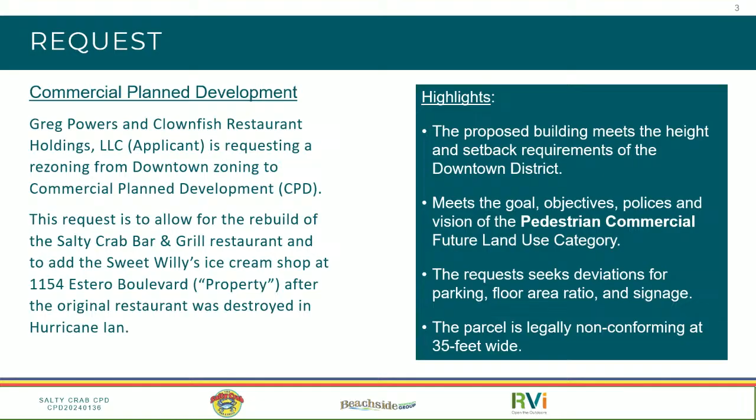This is a legally non-conforming lot formed, I think, in the 60s or before any of the official zoning codes, only 35 feet wide, where the standard is 40 feet. So it's a narrow lot, which adds some constraints to what we can do there. But we'll show you what we propose to do, and hopefully you like that.

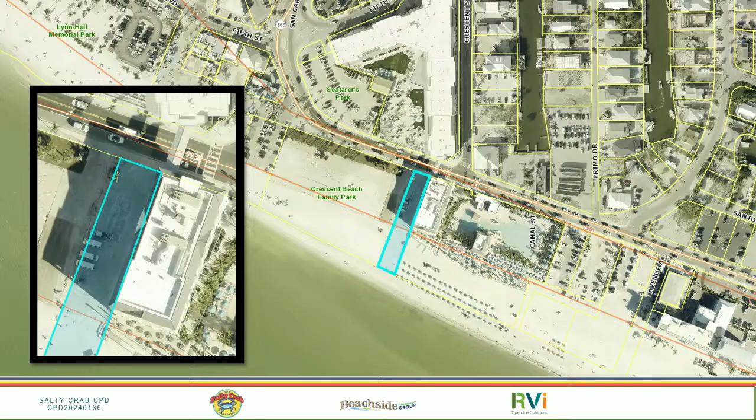You know the location really well. That's obviously the Margaritaville to the right, with the beach club piece. Did a little inset there so you can see it. To the left is Crescent Beach Park. There's a few things to note: these lines aren't exactly right with the property appraiser's data, but there's the entrance to Crescent Beach Park, and there's an electric box, a fire hydrant, and so on. None of those are on our property. We're right in between those and the Margaritaville building, and we have an entire facade that will face the beach park there. I'll hit on some of the design features of that.

So let's take a look at the past of this piece of property. What I did was try to look at the historical build and layout of the historical building, and I rounded the numbers. It's not exact, but we have a survey on it so I got pretty close, and there's property appraiser information too. But I rounded just for simplicity of discussion. So it was approximately a 6,000 square foot building.

This is excluding the special exception area that was waterward of the CCCL. But approximately 5,000 feet of it, you can see in the picture on the right, was under roof of some sort.

Right, I was there. Yeah, so I would describe this, I described this, and I hope I didn't insult anybody from my team, just as a seasoned restaurant when I was there. It's a lovely word. Sand and beer, it was just good, an appetizer, a great place. It was fun.

5,000 square feet under roof of some sort, which would count towards FAR, and there was a little over 4,000 square feet under roof on the ground level. That's a big part of this FAR request, that 4,000 square feet on the ground level. Most of that was back of house, the restaurant, storage, the kitchen. None of that can happen anymore, and it's very difficult to get even plumbing or electricity down to that ground floor now. So the use areas have to be pretty open, everything has to be movable. A big part of that FAR is now we have to move everything up to the top floor for that restaurant, and everything underneath counts as FAR. That was our battle in requesting the FAR we needed, since everything has to be elevated now.

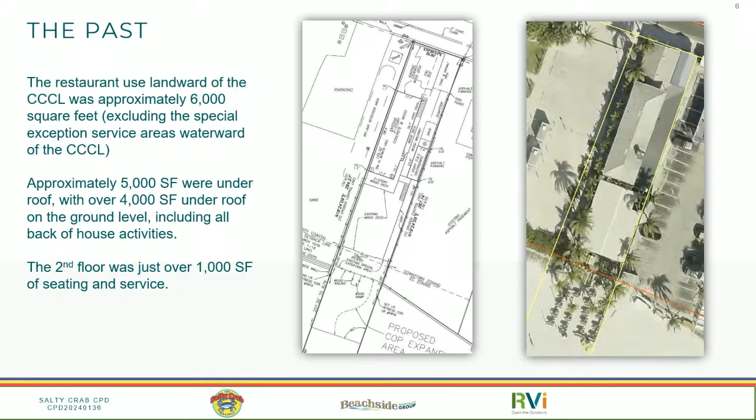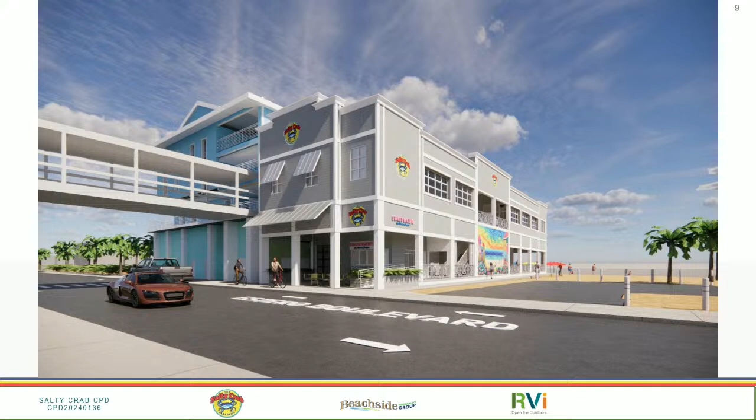So let's take a look at the future. We'll walk through a number of these. The first ones will be architectural renderings. The next ones will be more detailed, giving you all of our heights, square footages, and architectural details that we're willing to share at this time, because we want this to go as fast as we can to get this rebuilt. So we're moving along at our own risk at a pretty fast pace.

So this is the view from Estero Boulevard, looking across from the newly designed area in front of Margaritaville with the new roadway. A couple of the features here are the awnings, part of the condition we put to cover the sidewalk and start to provide shade. I know that's a goal very important to the town, to make this a more pleasant walk instead of just baking everywhere you go in the sun.

Wait a minute, before you move - where is the pull-off for deliveries? Yeah, I can show you that on one of the other pictures, there's a couple that show it really clearly. The renderings don't show it quite as clear, but it is right beside the Margaritaville building. It's a van delivery, not for the bigger trucks - a van delivery with an overhead garage door we can pull into. It's tight, but we can do that. I'll show you that in a second.

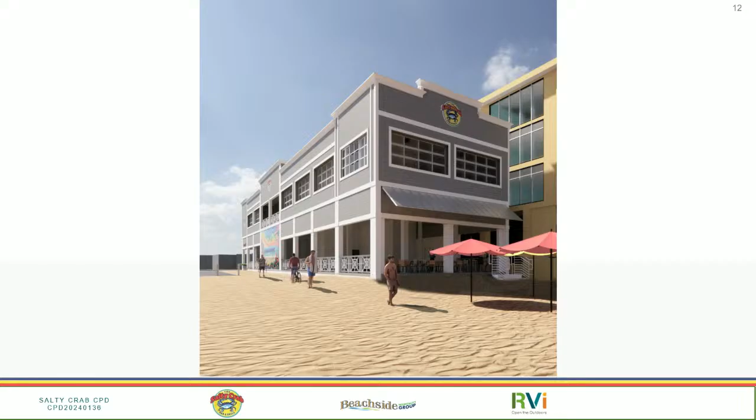All right, let's show the beach side. So this is looking from the beach - it's a little bit different. There's a seawall, a retaining wall actually there, and a few other things, but it just gives you that angle. It produces the same awning on that side. The doors on the second floor are actually overhead doors on tracks that can be opened, so all those along the side and on the back can be opened up during the day for air and breeze, to give that open air feel and be able to look at the beach.

Obviously there's requirements for turtles and things like that, but then there has to be screening and glazing to some of it. So we're working through the details of where that lands, but those can be opened and they are on tracks. So Fred, is that the reason why there's no awnings or anything else - your biggest facade is the most boring one? I'm just wondering, is it because of the roll-up doors or windows? Well, that was part of the thought, just to let that in. Yeah, that's a good question, we'll ask the architects.

We definitely wanted to hit the important parts. Estero Boulevard was the most important part. We wanted to mirror that on the other side, so maybe that's something to think through. That would be another deviation, since it would encroach. But it's just flat, the biggest view, and there's no setback there. I think with the awnings we're allowed to encroach a little bit, maybe 2 feet or so. So yeah, we would need a deviation for that, so that could be an architectural feature option.

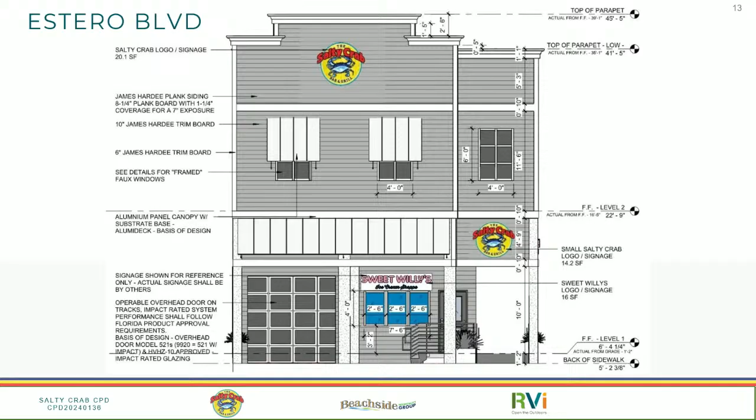On the next slide, this is the one we made a little bit larger over the mural, so that one's 40 square feet. And then we had that one over the entrance that's the same size at 20 square feet. So those are the two signs. This is where you see it from Crescent Beach, and actually from Times Square if you were walking down the street.

Here you can see some of the under area that's on the beach part with those railings. That's all outdoor seating, and you can see the Sweet Willy's shop in the front, and then the stairs to get up to the main seating part.

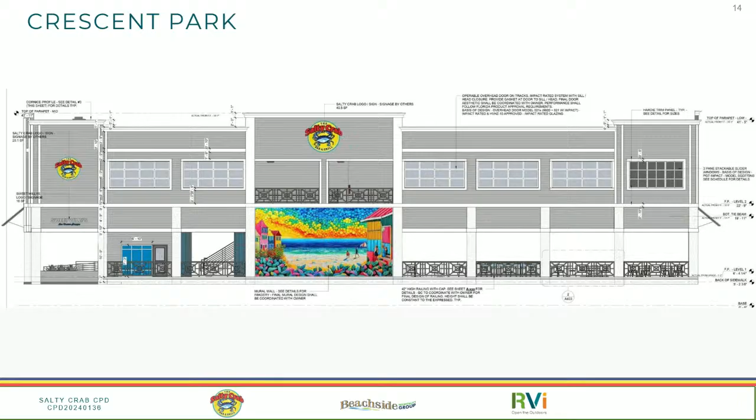So even with your zero setback, there is actually room for pedestrian traffic between those two buildings? Yeah, they have service doors and stuff they use. There's a sidewalk on their side in between there, so yes. Because Margaritaville's set back, you have room for a sidewalk, and they have room to maintain their building. If you have a zero setback, there's enough room that it's okay, they can maintain their building, and you haven't obstructed their views from their rooms.

Is there 5 feet between buildings? No, there's zero, there's a real sidewalk there, there's an access. I think there will be 5 feet, yeah, but it's on their side, Margaritaville's side. What's the distance between the two buildings? 5 feet, yeah. Between the buildings, there's only 5 feet.

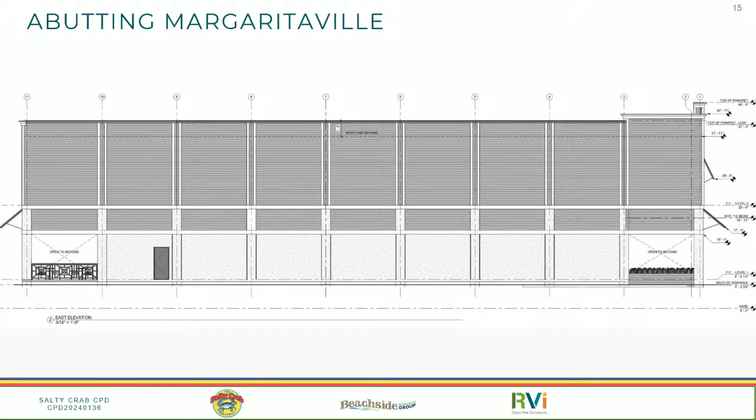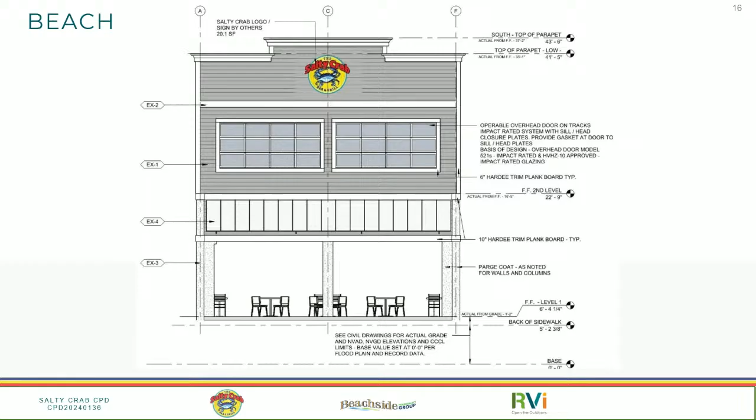Last one, beachside. Same logo up front, it's the 20 square foot logo up front. The retractable doors on the second floor, and then the open seating with the mirrored awning that's on Estero Boulevard. So those are the details of some of the architecture stuff. The architects can talk to even more detail about finishes and other details, but I'm going to move on from there if we're ready.

Fred, that's a rectangle. Rectangle, just in case you need that ever in the future again. Yeah, us planners are just basic math and geometry, shapes, it's just terrible. It's not my strong suit either. Thank you, yes, the rectangles.

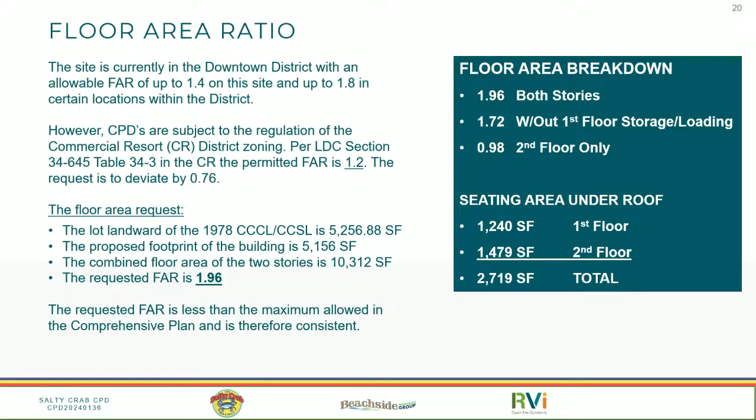Can they get service from the other side? Inside the restaurant, can they get ice cream service from the other side? No, not that I've seen in the design. Which other side are you talking about? Inside the restaurant, can you get ice cream service there? Just on the two sides? No, front and back - inside the restaurant and outside, under the cover.

Did that make your list, Anita? No, but I'm going to write it down. All right, ice cream service. I feel lazy, like I should be writing it down too. Okay, this way it looks like I'm doing something.

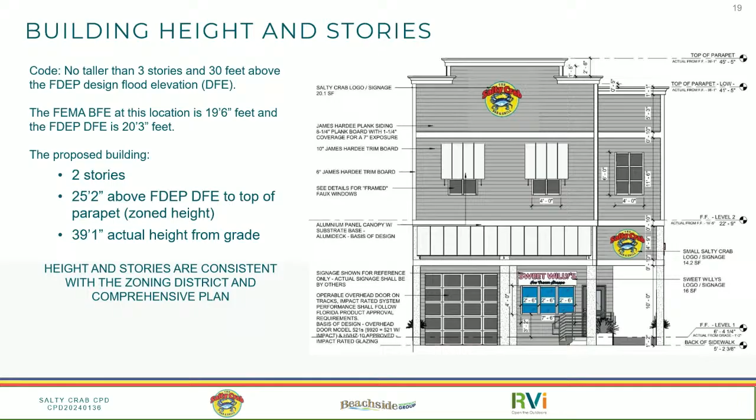All right, go ahead. So now, obviously, this isn't the zoning - what is on the ground floor or the upper floor doesn't necessarily have to do with the zoning. But like we said, we're pretty far along with this, and we're willing to share the details because everybody's excited about the possibility of this being rebuilt. So let's see where we're getting and really start to picture this thing. The light blue areas are the delivery and storage areas, dumpsters, and other things like that, a lot of which we did not have before, so that's a significant improvement of the site.

The, what do you want to call it - coral? Oh, coral, very good, like coral, yeah, shapes, colors, all these. I have a narrow band of what I'm good at, apparently. We'll keep reminding you of that.

So the coral color is circulation, check-in, those kinds of things. The blue area is service areas and seating, and then the purple is the kitchen and back-of-house operations. So you've got purple, lavender, aqua, turquoise, and coral - very good color choices.

I won't go on a tangent too much, but we played a game out there called Hues and Cues. It's horrible, I'm terrible at it. I should have used some of those, the lavenders and the periwinkle. You're far from periwinkle. Sorry, I wish that wasn't part of the record. But it is, it is, to live on.

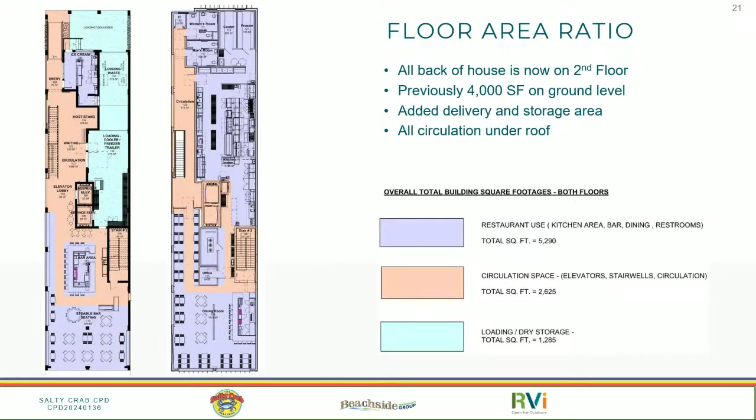Okay, so as we said before, all of the back of house now has to be on the second floor. Previously it was 4,000 square feet on the ground floor; we've added delivery and storage, and all the circulation is now under roof, so everything is under roof now. All right, so that gives you an idea of that.

All right, a little bit of planning analysis. These are the 5 deviations - I grouped some together on the setbacks. So numbers 1 and 2, we are complying with the downtown zoning district. When we switched to a CPD, that created deviations that we needed. For the street and the two side setbacks, everybody adheres to on the Gulf side - we pretty much adhere to the rear setback of 25 feet because we can only build to the CCCL line, so that deviation wasn't necessary.

The floor area ratio, obviously, we're above the 1.2, and we're above the 1.4, so we're asking for the 1.96.

Parking, so what would be required for a restaurant of this size is 64 spaces. In the narrative, I had 58 because my early math was off, and there was one little part that I missed. So it's actually 64 spaces that would be required, including all the COP area and the outdoor seating areas that are shown.

So we are asking for that 100% deviation. This is consistent with the original, and we believe for the parking, this is the right spot. If this is gonna occur somewhere, this is the exact spot that I think it's appropriate. We'll show a slide on that about the surrounding parking, but it's not knowledge that is gonna be new to any of you. And then sign area, we went over in some detail.

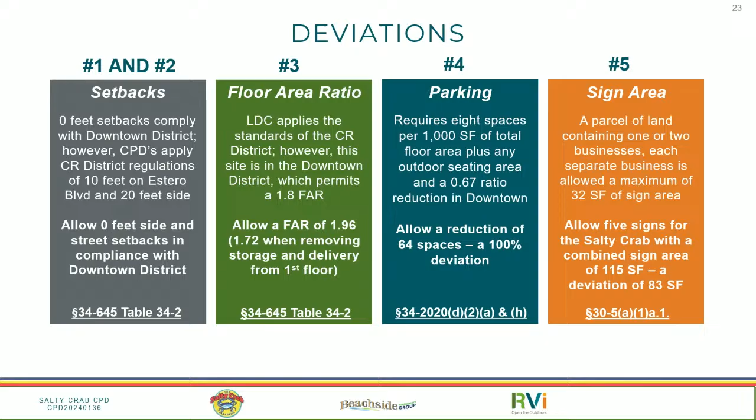Few things. So this is a slide we made a little while ago. I may be off by a space or two here and there, but we got the ballpark pretty good. So what we did was show a quarter mile walk shed, which is what is considered to be walkable for the large majority of people. It can actually expand up to a half mile as well, and that's the orange.

So we have the red and we have the orange. The red is the quarter mile, the orange is the half mile. Within that quarter mile, there are 800 plus spaces that are available. Most of those are public spaces, and then there's obviously some that have to do with Margaritaville and with the Lighthouse, with the Lani Kai and some of the other hotels. But within this space, this location is central to the largest density of parking spaces in Fort Myers Beach, being close to Times Square like it is.

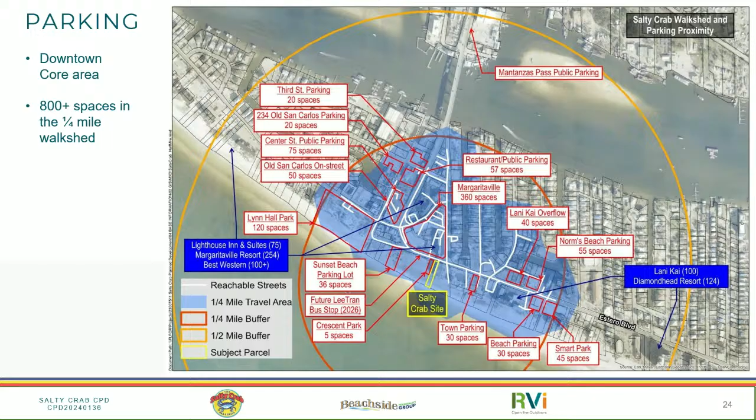So we thought this was a good slide, good for you.

All right, sign areas, so I did have a complete slide on this. I went over it earlier just because I thought it fit, and we didn't need to belabor that, but if you need real detail, it's all on one slide here.

And then LDC compliance, staff did a great job with this. We're in agreement, they recommend approval. We obviously agree with that, and we believe we meet the criteria for the 12 considerations of what it takes to approve a CPD. The 12 criteria approval for zoning as applicants includes the goals, objectives, policies, and intent, along with the densities, intensities, and general uses set forth in the Fort Myers Beach Comp Plan. So we believe we're consistent with both of those.

And comprehensive plan consistency, I am not going to go over these completely, but I do think there's a couple that are important. The pedestrian commercial future land use policy - we are within the quarter mile walkshed of Times Square and the most major retail activities in the downtown core. So we think this is just a benefit and addition that is going to be fun to have back in place, in the right place for people to enjoy by just walking up.

Upgrades to Estero Boulevard - there isn't a ton that we can do there, but we are going to provide the shading, and that's part of the conditions. The rest is just that we paid attention to the interaction. So the next policy is commercial activities must contribute to the pedestrian-oriented public realm - shade, commercial activities, beach interaction. We think this checks all those boxes.

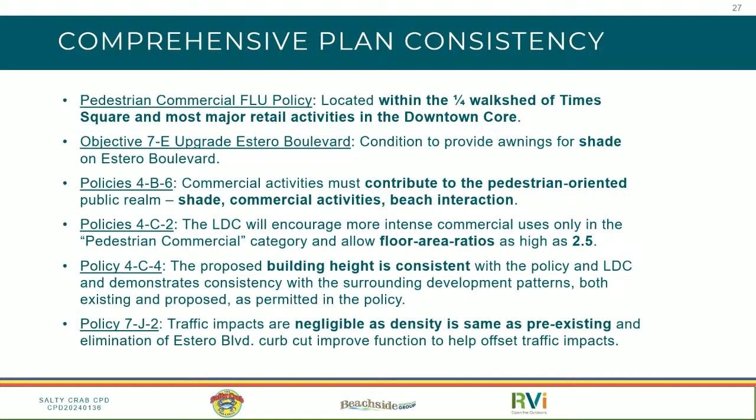All right. Do you have a question now? Okay, gave me a question look, but I'll go on to the conclusion.

We'll finish up. So I did have listed one slide that has the kind of key points that I want to make for this.

So one, it's the rebuilding of a downtown staple. We've heard so many times about the need for restaurants and services in this location. That's not only significant to this part of downtown and Times Square, but to the entire beach rebuild—having these restaurants and services. Bookings are going well in some places, but people still say it's not quite back yet. This is another piece of the puzzle that adds to the fabric of what will be a really fun place to visit. It already is, but how much more fun will it be walking around Times Square?

We believe some key points are improving the walkway along Estero Boulevard with shade and an interactive atmosphere to make it a pleasant rear walk. Ground floor open air seating and beach service in a highly walkable location. Facade facing Crescent Beach Park and Times Square—we believe it's attractive and inviting. We'll hear what you think. It meets height and setback requirements. The FAR deviation is really to move everything and elevate it up to the second floor, which causes us to cover the rest of the property, and that's why the FAR is higher than normal. The parking deviation is consistent with the original restaurant and is in the proper location, essential for rebuilding a non-conforming lot. That's important to remember too.

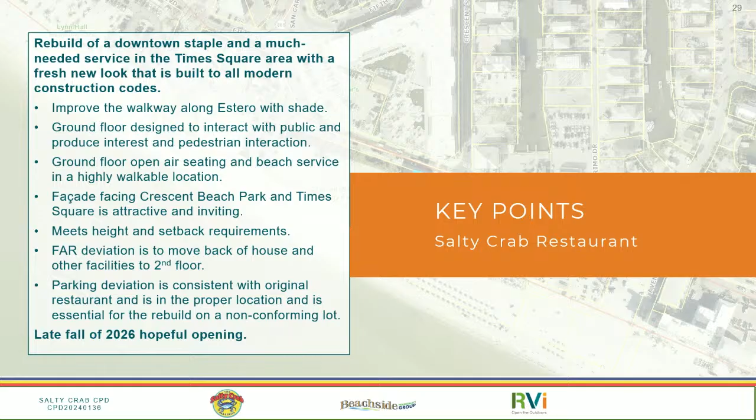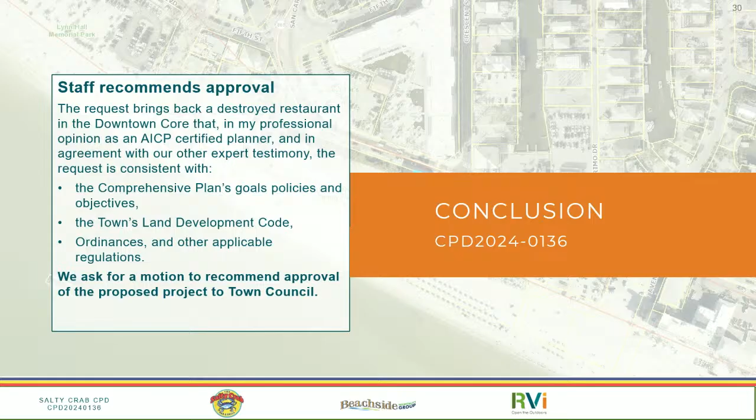This is 35 feet wide. It's grandfathered in—a legacy to have that there—but we wouldn't have 35-foot wide lots today, and we understand that. So staff recommends approval, and as an AICP certified planner, I believe this is consistent with the comprehensive plan's goals, policies and objectives, the town's land development code, the ordinances and other applicable regulations. We ask for a motion to recommend approval of the proposed plan to the town council.

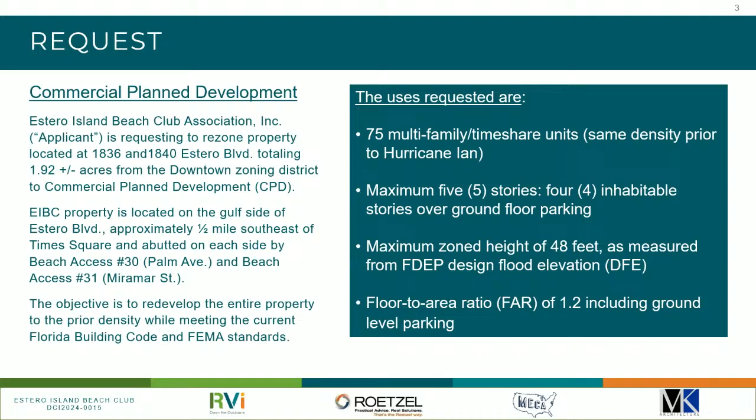As you may remember, we're just going to go through this quickly. We submitted this application and we've gone through this. We have presented a lower building height, so we're going with a max of 5 stories versus 10 along Palm Avenue, which is what you guys last saw and what was previously denied.

As you may remember, we got a recommendation of approval. You guys wanted us to take some massing off of Estero Boulevard. We did, but it got a little too high. Town council denied it, we went back, and they clarified that it was denied without prejudice.

Here we are, so many thanks to all of you guys for letting us get back here this time around. We're glad you're back. Thank you. We are too. Thank you.

So we did resubmit in February, and again substantially redesigned. As we've talked about, 10 stories down to 5 stories. We reduced the FAR slightly from 1.4 to 1.2, and we've added some public benefits that Jason mentioned - pedestrian improvements, beach access improvements, and again bringing back a big revenue generator for the town.

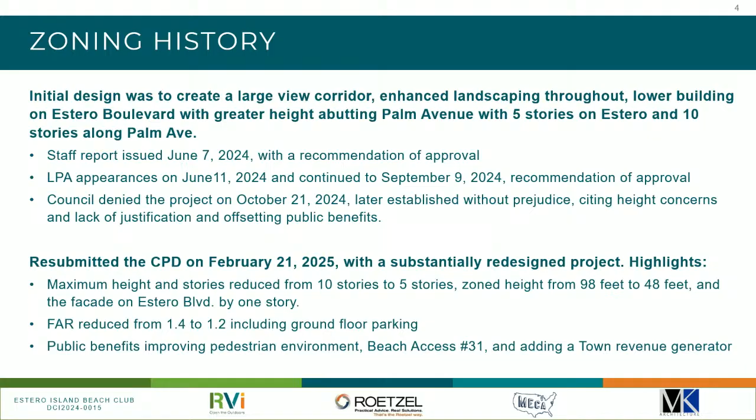So with that, before I hand it over to Fred, would anyone like to ask me any questions, or is it for the end? Just one, perhaps process one.

It seemed like as we went through the last process, since you brought it up, there was some disagreement internally with the owners and the board and all that went on, so it was a little confusing on where the alignment was on that. Do you feel differently about how this one has been set up?

Yeah, I think we ought to get on there. I have not been directly involved with every single board member and every single share owner, but this does seem to be a less polarizing proposition. Okay, fair enough. Thank you, fair enough.

All right, anything else for Amy? All right, thank you, my dear. For some reason I can't print, so...

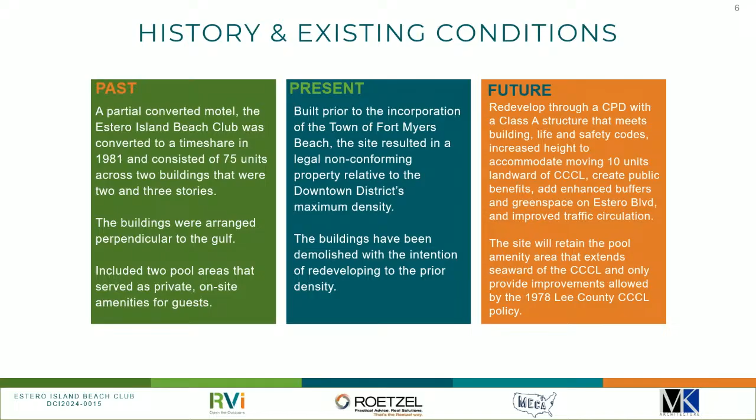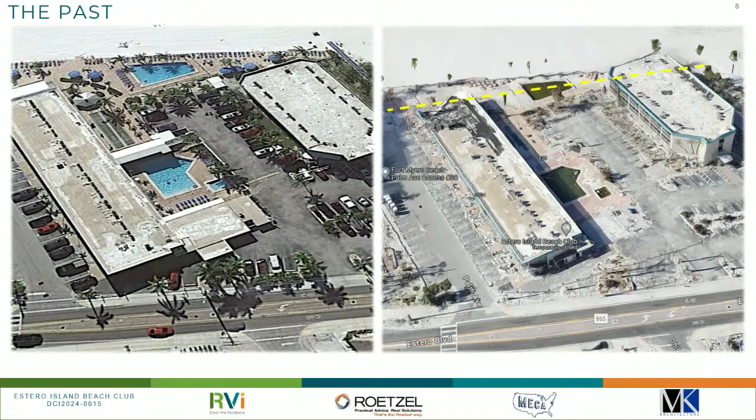So this is just a little bit of a visit to the past. And now I want to go through some of the features that were there and some of the little things that we're going to tweak. This is a picture of when it was operating, and then a picture post. So first of all, back-out parking on Palm, we're going to get rid of that, put some nice buffers there, and all the parking is going to be under building. There was limited landscaping before, that's going to be improved.

The multiple curb cuts on Estero, part of the land development code specifies that you want to reduce those for safety and circulation, so we'll take all the entrances off of Estero Boulevard and move them to the side streets. All these little spaces had some parking, some landscaping, but that's going to be drastically improved with no parking directly onto Estero Boulevard, all under building, and we think tastefully hidden.

And then the old three-story building along Miramar was just about 10 feet off the right-of-way there, so pretty close. There's residences on the other side, some rentals and some single-family residences on the other side of Miramar, so we're going to increase that setback.

Existing pool and decking waterward of the CCCL. The pool is still there. The pool equipment was on the landward side of the CCCL. We are going to replace that and keep that pool functioning.

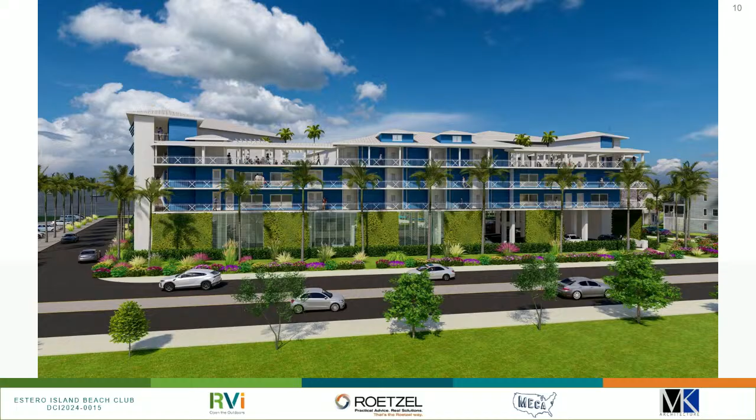So here's the facade on Estero Boulevard looking across the street. A couple of features: one you see, there's the parking underneath, where, just for simplicity, let's say 20 feet. Most of that is just three stories of habitable floors. We do have a centerpiece that does have rooms on it that's a fourth floor, and then some open air, like sunset view areas on top of the beach.

So what we did propose height-wise was, is it just a pitched roof? Is that what it's called? On Estero Boulevard, we could meet the height requirement if we didn't have a pitched roof, within inches. But with the pitched roof, we think it gives it a more casual, more residential feel. So our deviation distance on Estero is under 7 feet from the 30 foot that we'd be allowed above base flood. That's one of the features of the redesign. That is a full story lower than what we proposed prior.

You can see here the landscape we're proposing. There's 15 feet there, an enhanced landscape plan that is going to be part of this approval. I'll show you slides on that. What Jason mentioned underneath the building, you can see a couple of things that we did to hide some of the parking. We didn't want to hide all of it because you're actually going to see quite a bit of air or light through there. But we didn't want to see the cars in full, and we wanted it to break up.

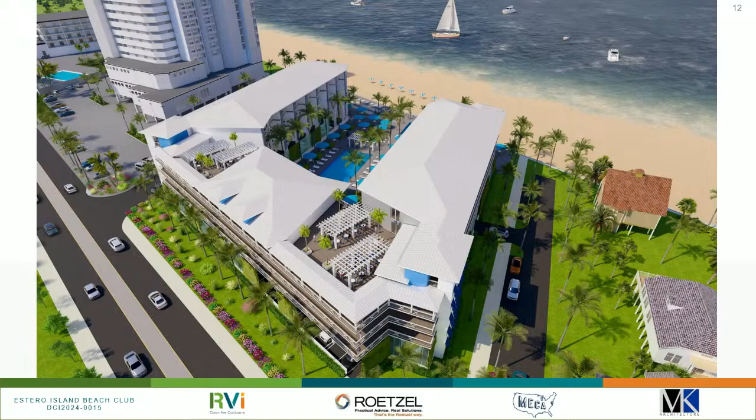And then we'll hit on the Miramar stuff, but the sidewalk and the parallel parking spaces we're proposing are on the EIBC property. There is no room in the right-of-way. They are on the EIBC property. I'll show you that on this one. This is our final rendering view. It shows the active terrace area, or the roof area, and gives you a little bit better idea of what's happening down Miramar Street. So we focused all of our public improvements on that corner and that side.

We have some pictures of the way it looks now and today. It's in need of some improvement. It's a beach access, but it was pretty limited in its use because there wasn't a sidewalk, there wasn't parking. There was a Mobi-mat there at one point, but it's gone now, so we'll be replacing that. But we want to promote this as a more usable beach access than it was prior. Most people always use Beach Access 30, which is the Palm Avenue side, because there's parking there, and it just looks more like a usable beach access. But we want to promote this one as a better use.

So there'll be the right of way, there'll be the parallel parking spaces, as many as we can fit in engineering wise. We think it's somewhere between 5 and 7. The sidewalk, and then our 5-foot buffer. And then we have 30 feet minimum of setback between the right-of-way, our property line, and the new building. Some of it's greater than 30 feet, so we went from 10 feet from the 3-story building out there to 30-plus feet with a 4-story building over parking. So we increased those setbacks, and that's some of the public benefit outline.

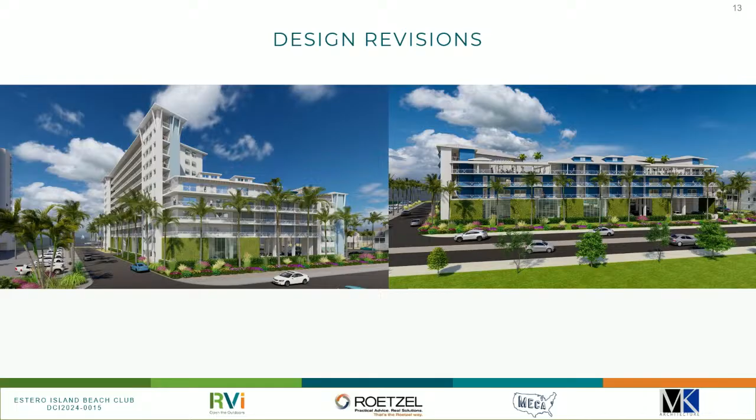I did think maybe there'd be somebody interested in this, so this is what we did propose, and what we went to council with, and what we're proposing now. So obviously the trade-off here for lower height is the next slide, that we don't have that huge setback, and it's just a parking lot, but it was a significant setback of 100 feet or so from Miramar. And now it does take up more facade, takes up more room on Estero Boulevard, but lower the height, we think it gives much more of a feel that fits into what it sounds like the town really desires. So we hope we hit that mark. But that's the difference of the two, and then I have one more slide.

Just go back 1 second, Fred, if you will. Gladly. Are the pools in both depictions at ground level? Close, I mean, only because I'm suggesting they're gonna flood. Yeah, they're gonna get filled up. And your design, I think, would have some sort of elevation. Yeah. It doesn't? Okay. Looked like it did in the old design, is why I brought that up. Well, it's level with this retaining wall. Is that what it is? Yeah, so it's at that level, so in that way, it is elevated above. Okay, just straight grade.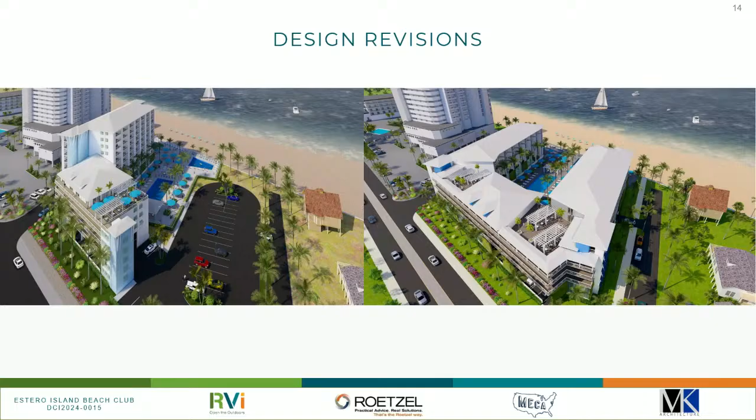All right, here's the heights and stories. So we broke this down to show you the really true zoned height, so this gets down to the nitty-gritty of what we're really proposing. So the zone height on Estero Boulevard is 36.8, so just under 7 feet above the 30 feet we'd be permitted. And then on Palm and Miramar, we're at 47.7, so that's the 18 feet we're talking about. It's just rounding it up to make it a nice even number and give us a few inches to play with. So that's our deviation request for the height: 18 feet over Palm and Miramar, 7 feet over on Estero Boulevard. And a decent amount of that, 6 feet, is because of the pitched roof, where we could go flat roof style, but it's just not as attractive.

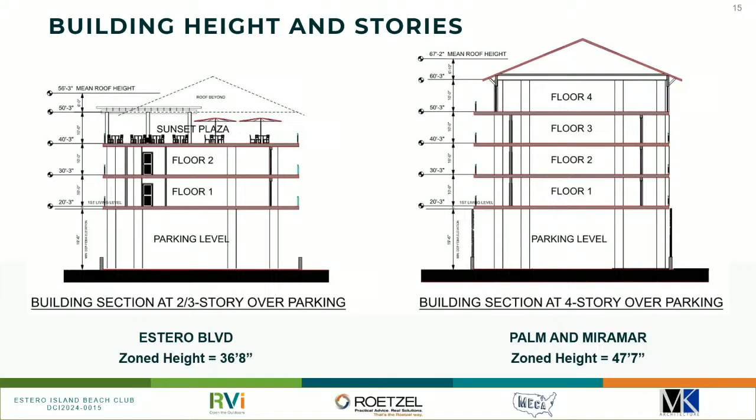All right, floor area ratio. Went over this, this is not a deviation, just one slide to give you clarity. The downtown zoning district would allow us 1.4, but since we're in a CPD, the CR zoning district applies, which is 1.2. We wanted to comply with everything we could and fought dearly to get there. The proposed building is about 100,000 square feet, including the ground floor parking, and we're satisfied with that. Ground floor parking is approximately 37,000 square feet, but we're not asking to remove that.

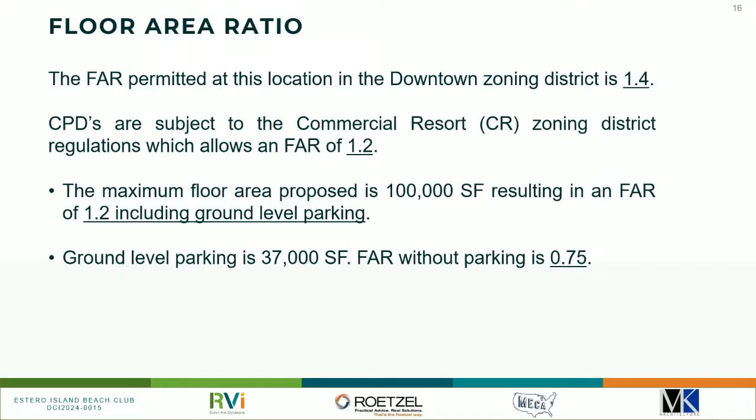Here's a slide we were asked to do last time, showing what it would look like from Estero, just on the broad perspective. The top is what we proposed before, the bottom is what we propose now. We hope you feel it fits in better with the beach, even though we used up more of the linear feet of the property. I think the fit and feel is more in line with what we understand the beach really wants.

And we agree too, this is going to have a really nice feel. It's just different when you're in a tower versus only a story or two above where you want to go, which is the beach and the pool area. It's a different feel, and you feel more connected to the people there, instead of them looking like little ants from the 10th floor. You're right there with them, and you could yell down that lunch is ready.

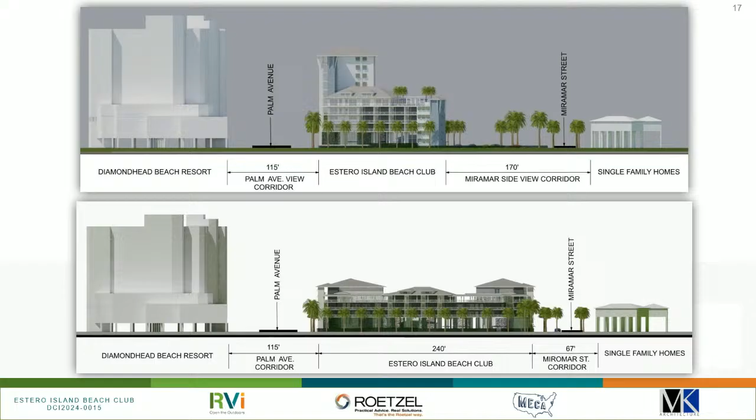All right, we'll go over the site plan quickly here, but there's a couple things to point out. We don't need to call it a view corridor, I don't need to get into what is or isn't one. We have 30 feet of setback running down Miramar, somewhat landscaped with green space and open space. So there is more distance than there ever was on that side to see through to the beach, and we think it's just a benefit to those properties across the street.

Dedicated buffers on all three sides. We're not required to have any buffers, but we have 5-foot buffers on Palm and Miramar, 15 feet on Estero Boulevard, and a conceptual landscape plan that'll be part of this approval. I'll hit on that real quick.

Single access on Miramar and one access on Palm, none on Estero Boulevard. We did move the solid waste, which was part of the last plan too, but we're pointing out that it's moved to the Palm Avenue side, directly across and very close to where the dumpsters are for Diamondhead. So that's just one small service area that doesn't interfere with single-family residences.

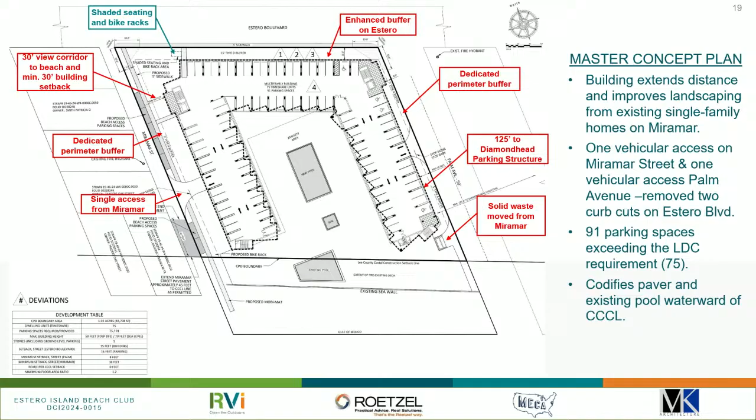Some of our public benefits in blue: shaded seating and bike racks up on top at that sidewalk area, in that corner landscape area. Public seating and a bike rack there, and then most of the other features we offered are settled into the Miramar side down towards the beach.

The gray area along Miramar are the proposed parallel parking spaces. We do intend to build those and build the sidewalk, and we'd love the condition at the end to be the long turnover for a use easement to the town for the parking spaces, so you can put those into the system and charge for public beach access parking. Also long-term maintenance turned over to the town. So we'll construct them, put them in, and turn it over to the town for maintenance and use.

Same with the Mobi-mat at the end, we're showing it here connected to the sidewalk. That may not be where the town wants it - wherever you want it, we'll put it. It's the end of the street, it was at the end of the street before. If there's gonna be a sidewalk, we think it makes sense there, but it's up to the town, whatever you want.

The extension, the other gray area at the bottom, is the extension of the roadway. That serves a couple purposes: one, it just finishes off the road, which is typically a requirement of an LDC anyway. But it also means we could fit 2 more parallel spaces there and turn them over.

It could be, we actually do have room too if we need a turnaround there, that's not our entrance. There's a concern if you're coming down that road in a parallel space, we'll need to turn around, so we're designing our entrance so they can make a 3-point turn there.

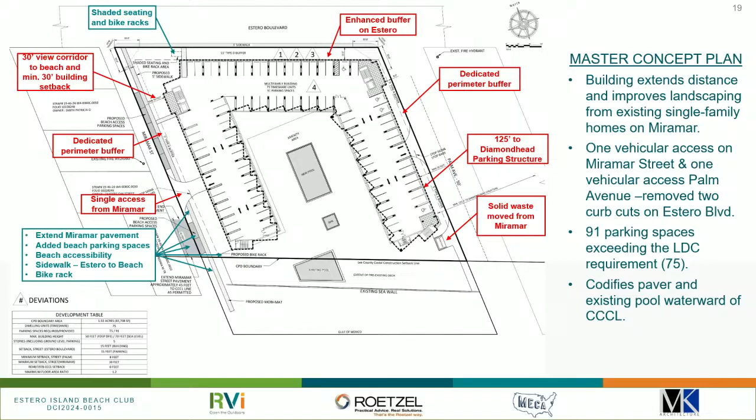Those are the main pieces of that. Did want to highlight that we do want this to be part of this, the development waterward of the CCCL that was there historically. The pool is still there, we want to just refurbish that and replace the pool equipment. The decking and pavers that go up to the retaining wall, we'd love to put those back and have those as a use as part of this.

I think I read that you're not looking to replace the Chickee Hut though, right? Yeah, that's not part of it. They feel like it might be quite a bit of trouble to do that at this time, so we're not proposing that as part of it. It would be very easy to do landward of the CCCL, but we use some of that up for building and for moving the dumpster, the solid waste, so we don't have that room. And to put it beyond the CCCL is a whole other battle.

So, live to fight another day. Yeah, okay, I have a question.

What did you find to be an acceptable size room for new sales and things like that? The room size we're proposing is 842 square feet. Don't you require 4,000 under roof? No, we don't, not for a timeshare, just questioning.

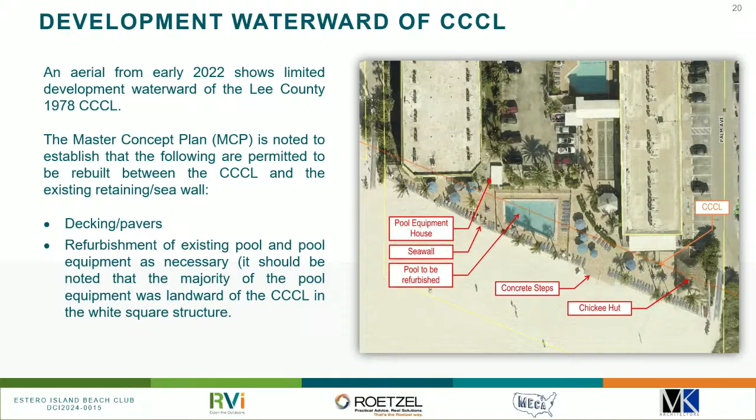I still have more. Oh, I thought you were finished. I'm ready to carry on. Oh yes, I'm finished. Are you really? No, look. That's another new slide, Josh is fully engaged now. No, I do have a few more slides. Okay, that's fine. I'm about 6 or 7 left. Oh no, a few more. Yeah, as soon as that comes back. You can't talk without a picture. There we go, yeah okay.

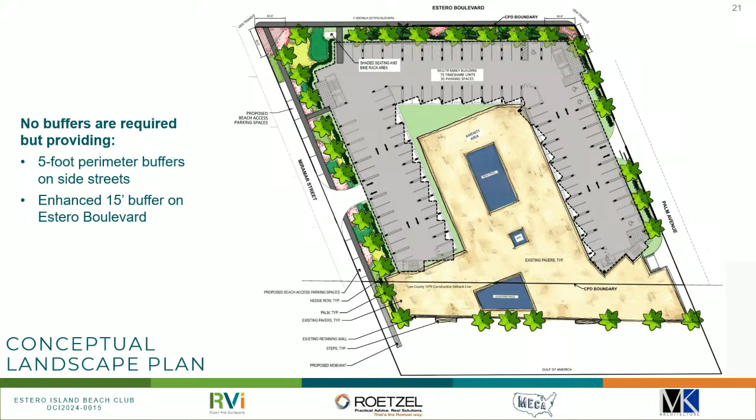All right, I just wanted to point this out. So we have done a conceptual landscape plan. I know you'd love to see what's really truly going to get built from a perspective from the street, we don't have that yet. We're just trying to balance between not spending owners' money who haven't even been assessed yet versus really showing you something, but this we can do and show you the landscape plan with some detail.

So we want this attached to the approval, and it locks in the numbers of hedges, number of trees that'll be put per linear feet. Page 2 outlines the smaller picture with all those species. We coordinated with the garden club on this and several other projects to come up with a list that they thought was most salt tolerant, looks good, provides some color, and it's an approved list from them.

So we coordinated with the garden club on that list, and that's the species list we would use. There's a fair amount of detail on this, and we would offer this up as part of the approval and the resolution, to lock us in on the landscaping we'd be providing around the perimeter, like the palm trees along Estero, and some canopy trees too. We have room with 15 feet for some shade, so we can design some of that to give shade over parts and break it up a little when you're walking along Estero, making a comfortable walk as far as we can, taking one property at a time.

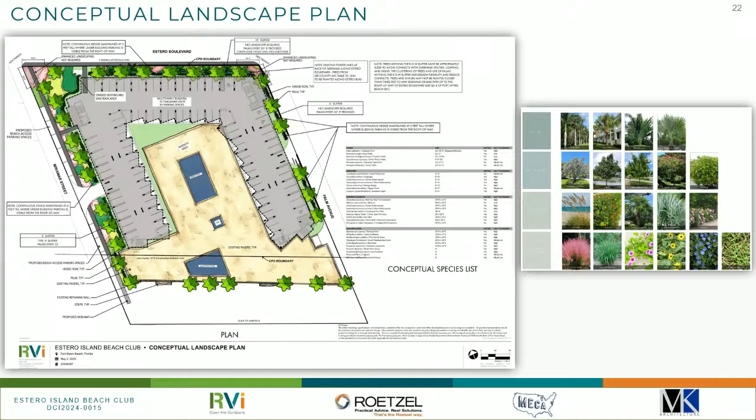The planning analysis, I don't think I need to spend too much time on this. The first two deviations weren't controversial the first time around, so I don't think they will be this time either.

Exceeding the maximum height, we said that 18 feet is our total request. And then for the build-to lines, we have this in here, but because we're the CPD, we're actually under the CR zoning district.

In the CR district we would almost meet exactly, with just one deviation off Palm because we're only at 8 feet where we'd need to be 20. But the downtown district requires two build-to lines, between 5 and 10 feet. It was suggested by this board last time that would be a good deviation for us to move the building back, so we did that.

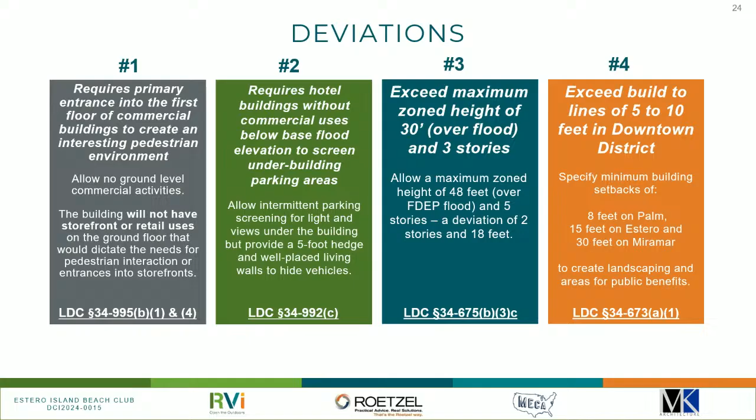So that's the deviations. I'm not going to do the LDC compliance, especially based on Judith or Jason's very good summary at the end. We agree we meet all the criteria for approval of a rezoning, specifically to the CPD, and we are consistent with quite a few of the comp plan policies and actually meet a number of those. We'll hit on a couple of these because I think they're worthwhile.

So the pedestrian commercial future land use policy - what we focused on was providing a better pedestrian experience and a better, improved use of one of the public beach accesses that was really just walking down the middle of the street out onto the beach, if you found a place to park somewhere else.

Now we could have a few parking spaces. We know how those fill up - they're always used, especially early in the morning, you can't even beat people to them. So a few spaces there will contribute to the public realm. At the end of Miramar, we'd have another bike rack in addition to the Mobi Mat, so you could ride your bike down, put it on the rack, and walk out onto the beach.

Upgrading Estero Boulevard with landscaping, buffers, shaded seating, and bike racks. Removing policy 4A5 and 4B8, which are about safety and rebuilding or moving units and not reconstructing over the CCCL outline - so we're adhering to that.

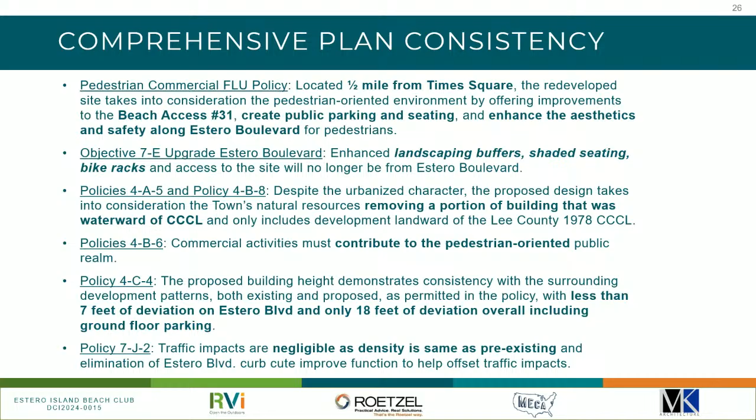So now, public benefits and the last conclusions, which include an economic benefit analysis. We spent a little extra money and went over this, so we have an economic benefit analysis of what a timeshare contributes to an area, and the results are - I love them - they're just great.

So here's the list of public benefits - I think I've hit on all of them, so I don't need to go over those again. The list in the blue text is what we believe is true public benefit, and we believe they're able to be done as zoning conditions and enforced, not requiring a separate covenant or developer's agreement.

So we would ask that we have conditions of approval with specific language about in perpetuity use and maintenance, requested to be included in the final resolution so we don't have to go through a separate process. Our initial discussion with staff is that we think these can be enforced through zoning, versus some other things presented to the town that are tougher or inappropriate to capture in zoning.

So that list is the true public benefits. The items in orange and green are things that will happen, and they're positive, but we're not including those in our list of public benefits because by any definition I understand, they aren't. Quality design, sustainability due to flood requirements and how we have to build, the economic benefits, and the safety improvements with the closure on Estero Boulevard and the right-of-way upgrades - I think these are all beneficial to the project, but I don't think we need to lean on those as calling them a public benefit.

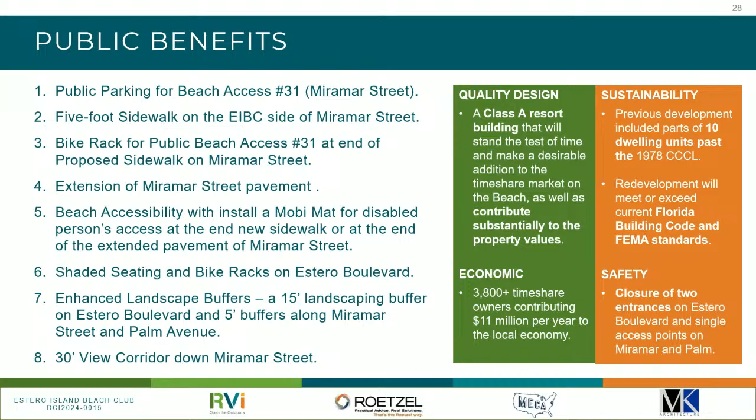And lastly, let's hit on a few of the numbers. If anybody is that interested, we have the full PDF of the entire report, but I pulled out three of the conclusion slides to highlight.

It's amazing, and that's a huge benefit of the timeshare. People have their weeks and they come, paying maintenance fees on them already, so they're coming. So then what do they do when they're here?

It's approximately 11,107 visitors, based on the average number of occupants, the rooms, and the number of weeks. Just over 11,100 visitors on a yearly basis, a number of them in the off-season when a lot of other condos and hotels have a much lesser occupancy rate.

So then what does that mean? How do the people spend? Based on all the different studies together, it was an average of $971 per person spent. That totals to almost $11 million into the local economy every year spent on room and board, in this case maintenance fees, but also restaurants and any other service you want to use. So $11 million to the local economy.

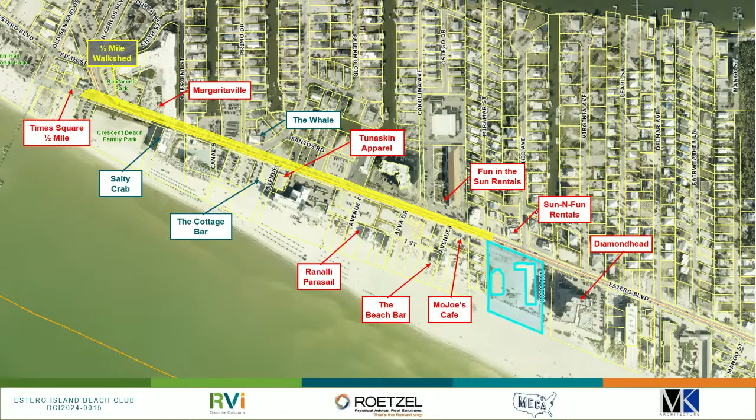So what I want to do now is go over the conclusions, which are just a standard statement about my professional opinion as an AICP certified planner, in agreement with our other expert testimony, that we are consistent with the comp plan goals and policies, objectives, the town's land development code, ordinances, and other applicable regulations.

But I do have one last piece that I want to do. I want to bring Jim Murley up, because I think it's interesting to hear the next steps, what they're required to do and what they're working through in this process, and just his personal thoughts about it.

Will you be coming back up then for questions?

I will, I can, yeah. Okay, I'll come back up. Come on up, Jim, just trying to get the stage right.

For the record, my name is Jim Murley, I'm from Indianapolis. Hey, Midwest, getting ready for the biggest one-day sporting event in the United States, maybe in the world. It's here in a couple of weeks, and I'll be there. Anyway, proud of our Indiana Pacers, they're gonna beat Cleveland tonight. Hopefully nobody's from Cleveland. You gotta be careful with that stuff, I'm from Indianapolis, so... I'm from Indiana.

I've never been to an LPA meeting before, and hopefully I won't get too far off track, but I've seen all of you many times over the past 2.5 years visually, and tried to follow as much as I could what's going on down here, but it's been a tough, almost 3 years for all of us. I want to recognize I've got 4 other board members sitting back here, so there's 5 of us here, and I appreciate every one of their efforts, and I especially appreciate the ownership for sticking with us to the extent that they have.